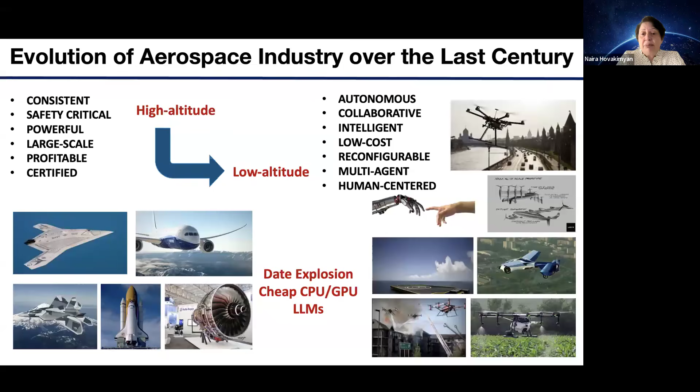This shift in the industry, as we observed it happen in front of our eyes, was largely conditioned by the fact that GPU and CPU technologies became cheap and available, which boosted machine learning algorithms up to foundation models and large language models. From the perspective of the aerospace industry, we observed a shift from high altitude space to low altitude space, for parcel delivery, emergency response, spraying for farms, and other applications typical of low altitude operations.

If we look at commercial aviation's evolution over the past century—it has been more than 100 years that commercial aviation has been available to us—by enforcing zero tolerance to accidents, commercial aviation has achieved safety and public trust, carrying 4.5 billion passengers over the year. It's undoubtedly one of the safest industries for transportation. As we now move into low altitude space, we need to develop the same level of public trust, because what we observe, especially over the last year, starting from the DCA airport collision and many other accidents in the low altitude space, shows that this industry is not yet ready, not yet mature.

There are lots of issues to be solved here, from path planning, routing, optimization, autonomy, and other types of solutions that can be vital for improving safety for this low altitude space.

This is one example scenario that was put up by MIT and Lockheed Martin back in 2018 to address challenges that have to do with emergency response in post-disaster areas.

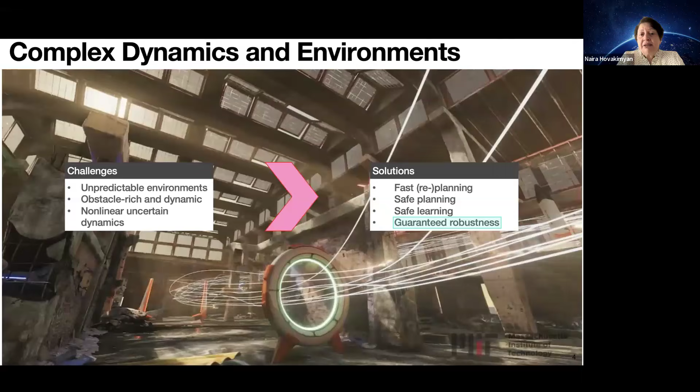What we observe in this environment is that one has to have vision-based sensors that can map the environment and help navigate the vehicle.

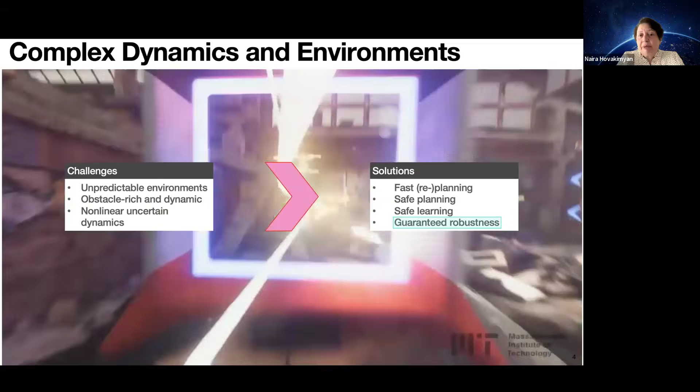In this environment, we need all types of guarantees of safety, robustness, and robust learning, fast path replanning - things we don't have to deal with in commercial aviation, where your flight envelope is prefixed and predetermined with maybe minor modifications along the way. Here we have continuous update of the environmental map that decides your next navigation point, and it brings up new challenges for the control design solutions.

So what is the situation here for the autonomy pipeline that we are interested in improving? We have sensors that map the environment, the sensors help the planner generate a path, and then the autopilot has to execute it.

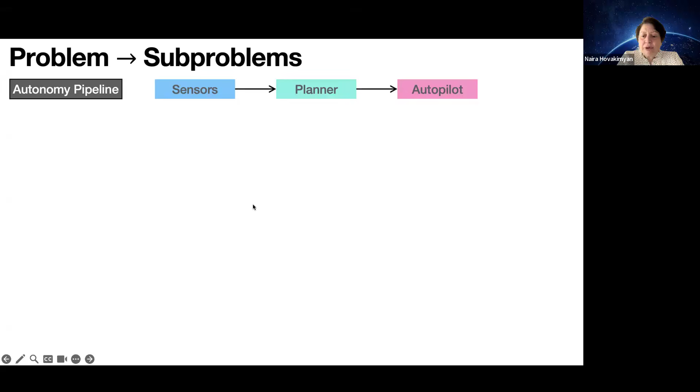The sensors map the environment, identifying obstacles, hazards, and goals. The planner generates the trajectories that the low-level autopilot has to follow. So the key question: what if the autopilot cannot deliver what the planner is asking for?

And what if the planner does not account for the errors in the environmental map? It's critical that the autopilot has awareness of its own performance and limits, and is capable of communicating it back to the planner so they can work in coordination.

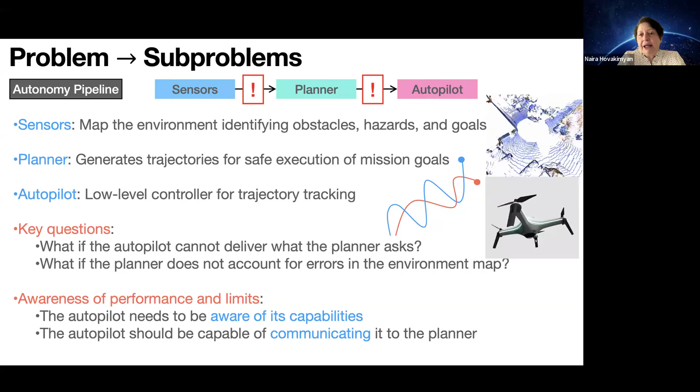This is basically the autonomy challenge. You have sensors, and you have to execute what the sensors map and guarantee safety in terms of a planning trajectory, and then you have to get feedback back.

The fundamental challenge that exists is the language barrier, because these are different systems on different levels of abstraction, and they all need to talk the same language.

This is because we have subsystems with data-driven learned components, while the typical autopilot will have, say, a PID controller or some other controller that comes from a deterministic model. This language barrier creates lots of challenges in terms of assessing the system's performance and robustness.

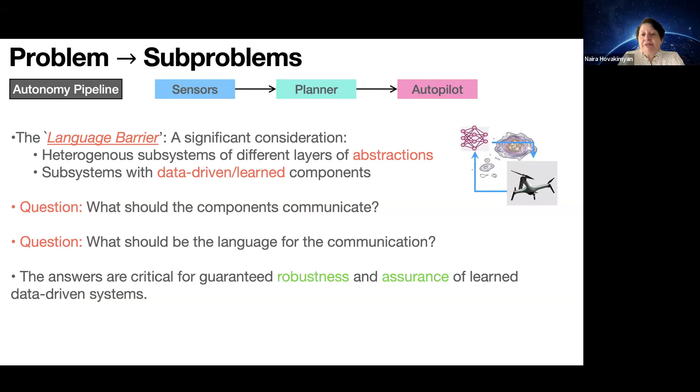So the questions we face: what should the components communicate to each other, and what should be the language for the communication? Typically, because this whole pipeline is huge, it goes from mapping, sensing, planning, up to control.

We observe different communities talking, developing their results in their own language, and quite often they don't talk to each other in a proficient way.

For example, people who do computer vision and path planning always make an assumption that there is some good autopilot that can track and follow whatever they do. But this may not always be the case, and this is where sometimes the robustness challenges appear.

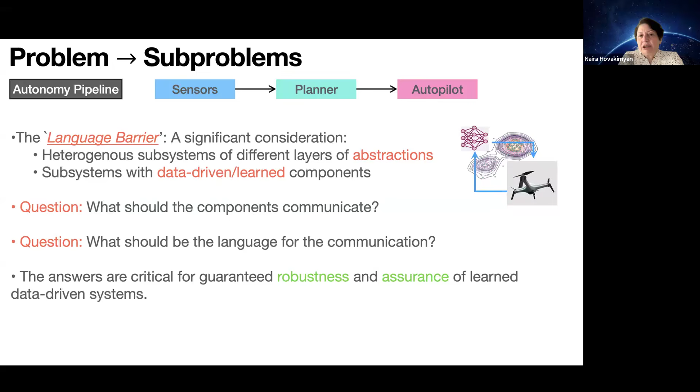General consolidation between machine learning and control should solve this language barrier problem. So given a system...

One would try to create its estimate by using the data and considering some model class, let it be neural networks, and minimizing a loss function, which would be the mathematical expectation of the loss function over the training data that was available to build this estimated model.

We refer to it as empirical risk. It depends upon the empirical data distribution given to you, either from past experiments, past trials, or simulations, flight simulators - there is some empirical data. There is a model class that we would choose, and based on that, we minimize this mathematical expectation over the training data, referring to it as empirical risk.

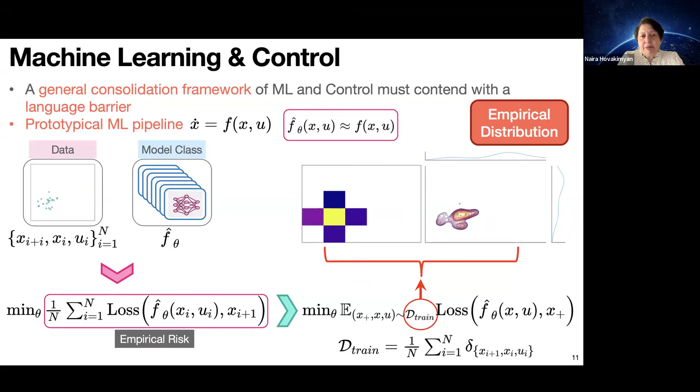What guarantees can we expect from these machine learned models? The trained model usually gives us the parametric estimate.

And the learned model certificate, which we refer to as model risk, will be guaranteed dependent upon the distributions - these are distribution dependent performance guarantees. It can be extended to Wasserstein ambiguity sets around the empirical distributions, and the literature is rich with different tools for how to achieve it.

However, when we go to the real world, we would rarely experience the same data sets. There will always be data that has not been captured during the training, during this machine learning process.

The causes of these distribution shifts are insufficient data, which can be epistemic - the learnable data - and aleatoric, which are unlearnable disturbances, environmental uncertainties that cannot be predicted. Engineers like to refer to these as known unknowns, unknown unknowns.

In the machine learning community, they refer to it as epistemic and aleatoric uncertainties.

So what are the typical solutions? These uncertainties that could be learned have an acceptable cost. For example, if you look into these animations, you can infinitely play with it, crash, fail, collect the data, learn again, and make sure your machine learning model gets better and better with more data and more learning.

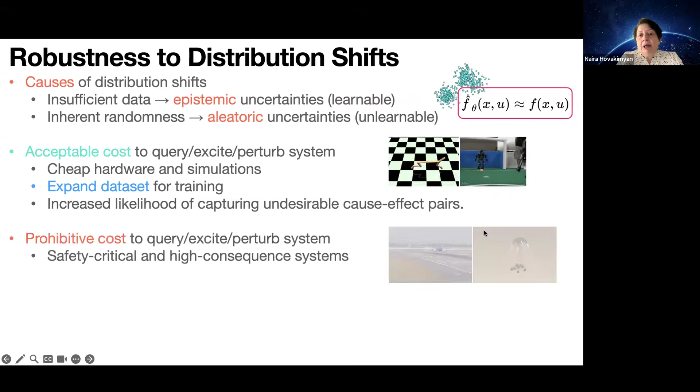But when we deal with safety critical systems like airplanes or landing a rover on Mars, you cannot go and crash infinite times, learn, collect the data, crash, and get this perfect machine learned model. So the cost here is prohibitive.

We need to analyze the systems that generate the data. We need to have architectures that would ensure safety regardless of the performance of the learning. This is the key point. So how can we ensure predictable and safe use of machine learning methods in controls?

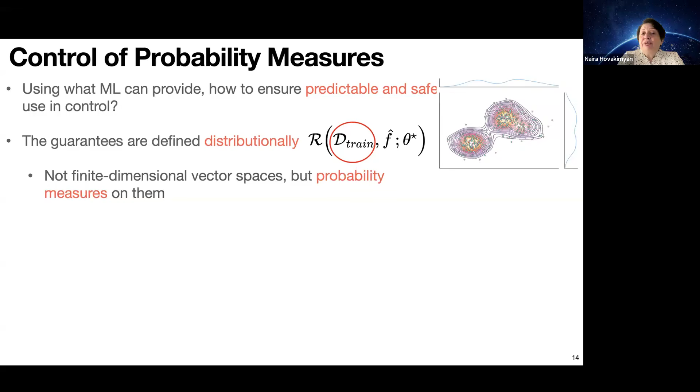The guarantees that are defined distributionally are not on finite dimensional vector spaces, but probability measures on them. Therefore, we need control architectures that would satisfy a priori uniform guarantees on the space of distributions, probability measures, and they would be applicable to general classes of nonlinear systems.

Subject to both epistemic and aleatoric uncertainties. This way, we can enable safe use of machine learning in control, right? And we can have safe predictive control, so to say.

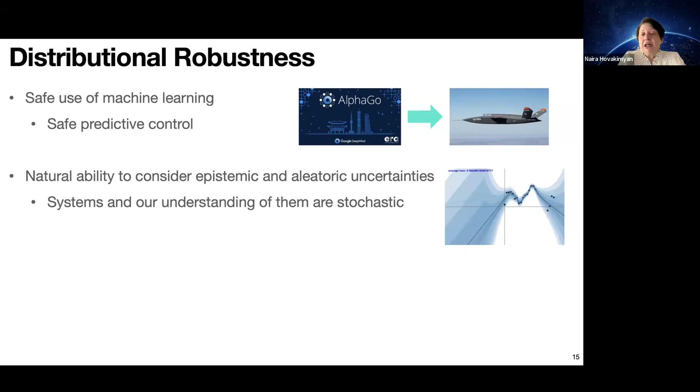Integrating both, a control architecture that would have these a priori guarantees, that would enable accommodation of a machine learning model, should be cast in a way so that it boosts our natural ability to consider epistemic and aleatoric uncertainties, the models of which are typically stochastic. And we can bridge the space between the design space and the test space.

If you look now today, for example, the way commercial aviation flight controllers are certified, they are designed deterministically using some gain scheduling, linearization, PIDs or LQRs with robust augmentation, and then they are tested in Monte Carlo simulations where uncertainties are inserted that are of stochastic nature. And then if you check all the Monte Carlo green, you are good to go.

But we can have a rigorous connection between the two spaces if we talk the same language and provide mathematical foundations, rigorous proofs to merge the language between the two spaces to have everything provable and predictable.

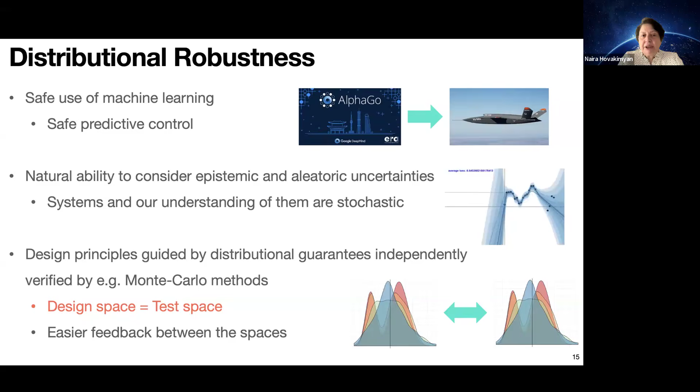The field of distributional robust control is rich. We are not the first ones asking questions of this nature, and we borrow lots of the results from the existing literature. However, there is one fundamental difference between what we do and what others do, and I will go through the details through the presentation.

We do not implement distributional feedback. We will prove distributional robustness guarantees for a deterministic feedback, and I will clarify this difference through my presentation.

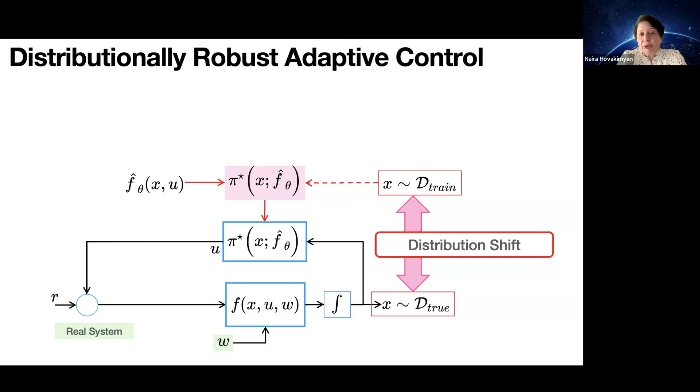So assume you have some machine learned model, which is here the f hat, kind of subindex with theta, function of system states and controls, that has given you the optimal control policy, denoted here by pi star. And as we implement, we face this distribution shift because the data in the real world will be different from the one that was used during training.

And we augment the system basically here. We want to augment it with our L1 adaptive controller that has been flown and tested on numerous systems over the past 20 years. So why L1 adaptive control?

It's a deterministic controller, but here is where we work to make sure the language is clean and all the proofs are very rigorous when you bring in a deterministic controller into a machine learned architecture. So let me just do a brief recap of L1 adaptive controller.

I have presented for MIT twice, so I will repeat a few things which are important for the rest of this presentation. It's an adaptive control architecture that has a low-pass filter in it. However, the low-pass filter is not blindly inserted into conventional model reference adaptive controllers. Before insertion of it, we use a state predictor type architecture to have a well-conditioned error dynamics, which is agnostic to the control signal and allows this low-pass filter insertion very rigorously.

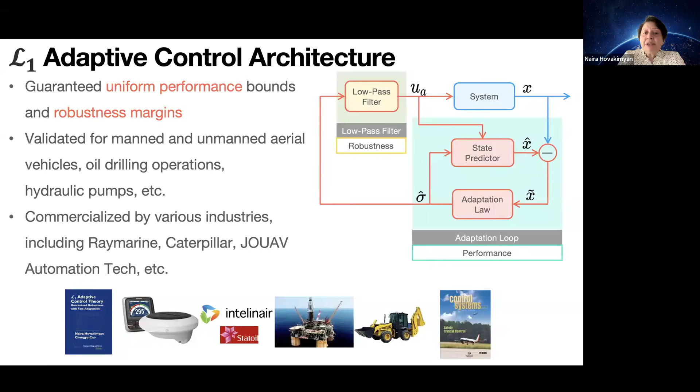It helps us decouple the performance bounds based on the adaptation gain, which improves the performance. The faster you adapt, the better you do. And the robustness is tuned through the bandwidth of this low-pass filter. This decoupling of adaptation and robustness is the key to the successful deployment of L1 adaptive controllers across a various range of platforms.

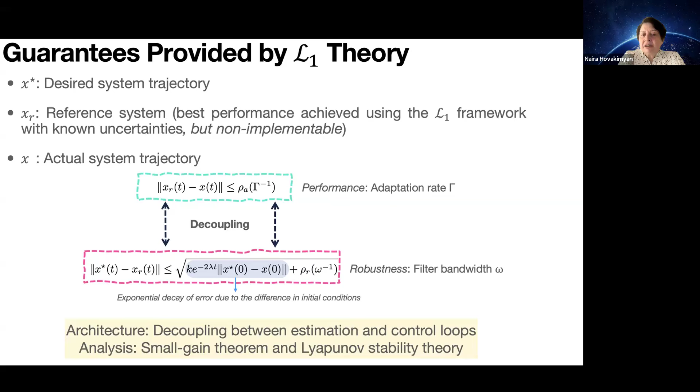So this architecture relies on small gain theorem and Lyapunov stability theory for its proofs. These methods are well established and exercised over the years. This is a deterministic solution, so it has certain conservatism coming from small gain theorem and Lyapunov stability theory.

The history of L1 adaptive control is summarized in this slide, starting from 2006, when we had the first papers appearing in ACC. In the same year, we had a path planning paper with a flight test appearing in AIAA GNC conference. The flights were done by Naval Postgraduate School using the Rascal autopilot, Rascal UAV with Piccolo autopilot. Then during 2007 to 10, we had NASA flight testing the L1 adaptive controller on a subscale Boeing 757 model that you see here on this slide.

Later, this success story led us to lots of opportunities to work with Raytheon, Boeing, and other companies like Eurocopter, MBDA, for testing it on different platforms. Raymarine commercialized it for evolution autopilots for marine vehicles. Caterpillar commercialized it for hydraulic pumps. Statoil tested it on an experimental rig, and then that was before the oil prices crashed, and we remained on the experimental rig. It didn't move forward due to the change of the world towards green technologies. So there was a period when the oil industry was suffering. Later, we got this opportunity from 2018 to 20 to test it on real Learjet and the Vista F-16 platforms at Edwards Air Force Base, test pilot school. I had a former student working there who gave us the opportunity to fly these platforms, and I will show some movies now.

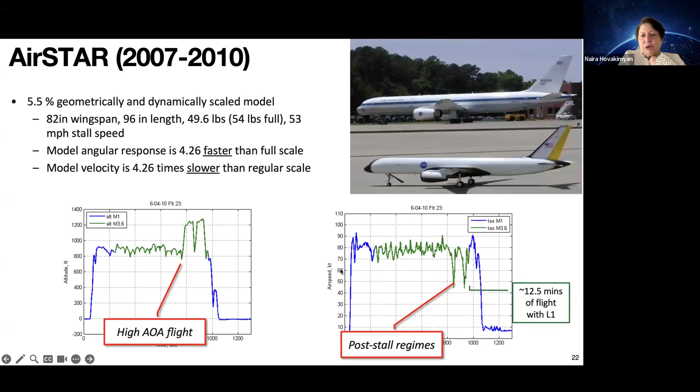So here are some brief flight tests from NASA, past 2007-10. NASA spent a few years to build this subscale Boeing 757 model, and they pushed it into stall and post-stall. These are one of the first tests here. As you see here is where they go into stall condition. The airspeed drops below 40.

Slow down just a little bit. We're going to try ramping up to 15. Hold it around 18. Slow back to normal flight. Fuel state is 4.7. Let's repeat that. Climb maintain 1,200. Now slow down a little bit. Okay, gonna start my pull here. Bingo, they ran out of gas.

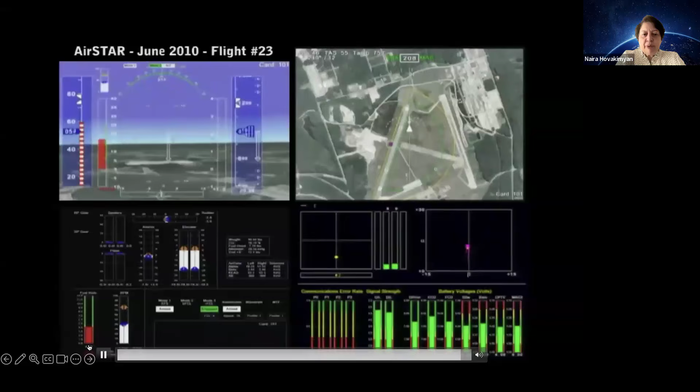So just to summarize, this was the only controller flown by NASA into stall and post-stall flight regimes.

Here is where they go into the departure edge of the flight envelope. The stall occurs at 12-degree angle of attack, as you see, and they push it to 28, and they start Schroeder sweeps for system identification. Setting 40% RPM for the entry. So they use it for updating the aerodynamic models.

Here is a quick capture of two trials of going into stall and post-stall, and they even note repeated oscillations, because when they go through that stall condition there is some shaking. So the repeatable results were verified per the theory.

And it's more exciting, of course, to watch how it was flown on manned aircraft, because it's one thing unmanned, it's one thing manned. With the manned aircraft, they didn't have the flight opportunity to go into stall and post-stall. But here is a flight test when the pilots are required to do flying qualities assessment. So when you fly an airplane and you have no fasten seatbelt sign, it's flying qualities level 1. When you get a little bit of turbulence, then it drops to flying qualities level 2, level 3.

Test pilot school students who are going to get their pilot license are given a paper with the Cooper-Harper rating scale, and they have to do flying qualities evaluation. When the airplane shakes up because of inserted disturbance, this was the type of F-100 Sabre dance - there was a famous accident I won't show here. So they're asked to do this flying qualities evaluation, and it's very shaky, they can't do it. They ask for the L1 controller to come on. You'll see them request Cooper-Harper ratings, CHR ratings - it will come up as an abbreviation. I give this preview so you know what to watch for.

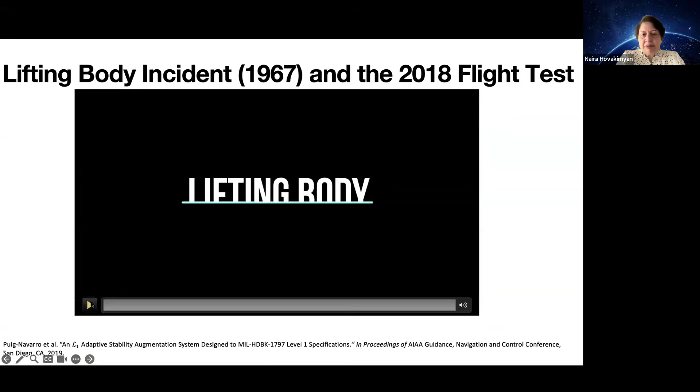In 2018 we went for different types of uncertainties. In this case, they had aircraft accident data from 1967 that they were able to load onto the airplane, to see how the airplane would behave without our controller and with our controller.

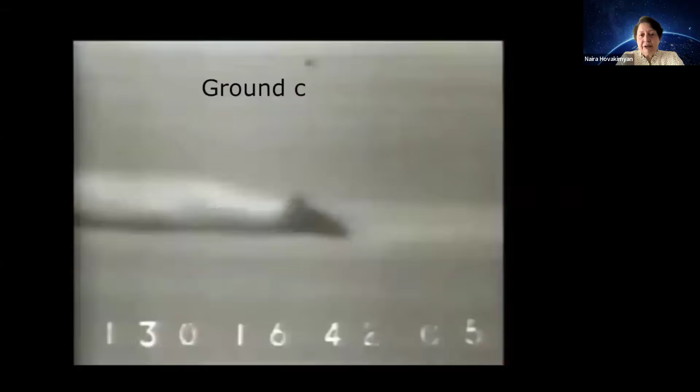So this is the way the pilots get their pilot license. They have this test aircraft on which they can mimic different dynamics by loading data from past accidents or mimicking other conditions. It has this variable stability system that can shut down the accident to save the aircraft. Now you will see - it's a second, and it shut down the accident to save the airplane.

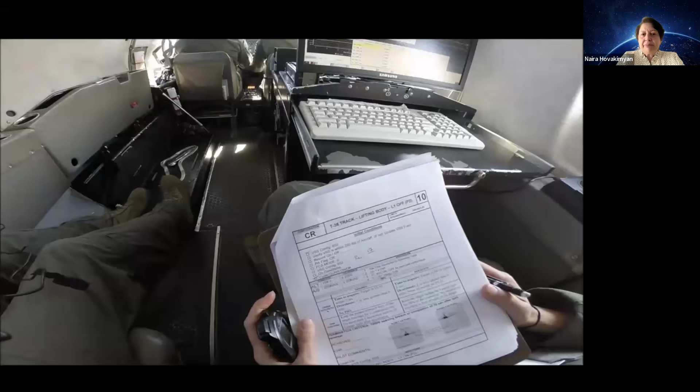I can't even control the airplane. Do you have your airplane?

You see the student on the left is my student, and on the right we have the flight test engineer.

Now L1 controller on, they go through the same accident. Okay, task in 3, 2, 1. Now?

So you can feel there, in high frequency I made some high frequency inputs, excited the roll. Lower frequency, the roll overshoot or oscillation tendency is less. Sounds good, there's still some there. Pitch, I'm having no issues. Fine tracking and gross tracking are very good at pitch. All right, and I have maneuver complete.

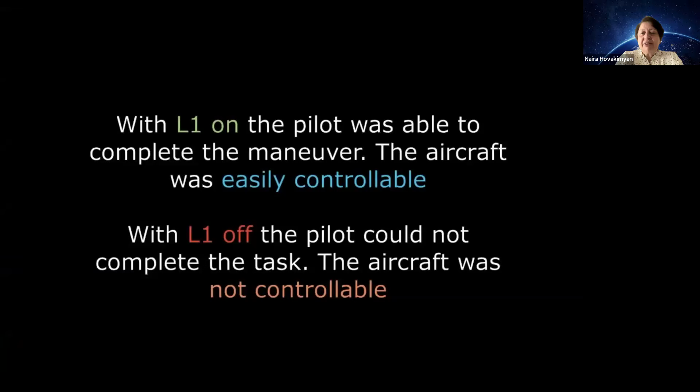You heard it said there is still something there, and our stochastic analysis brings the answer to that.

Now they go into engine-out flight test.

All right, recording on in ready, hack. Running. Okay, power's coming back. My hands are free. 3, 2, 1, now. Controls fixed. Recover, please. You see 20-degree bank degradation here on the right.

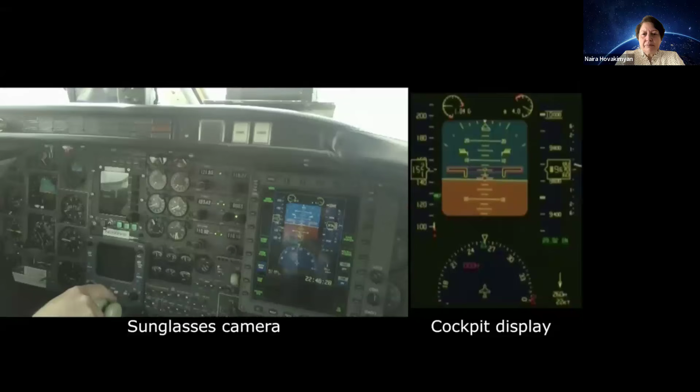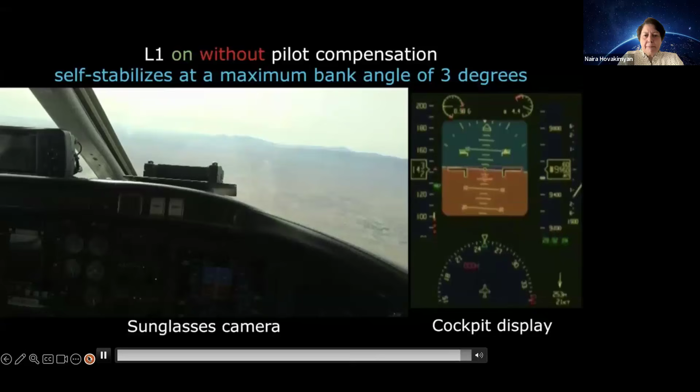And now they go with L1. Ready for the recording on, ready, hack. On. Okay, left throttle coming back in 3, 2, 1, now. I'm not touching the controls. Nice demonstration - yeah, check that out. About 3 degrees of left bank, stepping on the rudder to match. I can feel it, it's descending a little bit, but that would be easy to compensate for. Yeah, okay. I think you got some good data there. All right, recording off, matching power, recordings coming off.

So you see something was left there in the first flight, and something like 3 degrees are left here in case of engine shutdown. These are questions that the deterministic analysis could not answer, but the stochastic analysis that we did brought the answer for these questions. And now I will go through details.

We were on the front page of Aerospace Defense Technology.

I got this message from our College of Engineering. I was not interviewed in this case.

It was great to see that we were captured by some media sources, while in previous cases we were always interviewed by Aviation Week.

With these great success stories, this year we had Lockheed Martin using the modernized Vista for autonomy architectures, flying heat to guns with a failed right flap. I have only 12 seconds of video released by Lockheed Martin for my presentations.

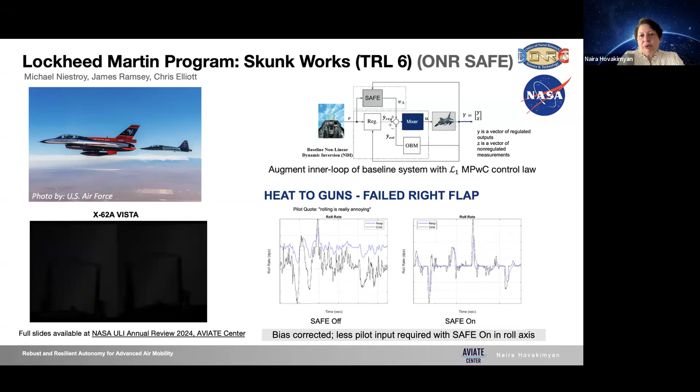Just observe how it remains in green, and in the other case, without L1, it's out of the green. SAFE refers to the ONR SAFE program, and Lockheed Martin was able to claim TRL6, Technology Readiness Level 6.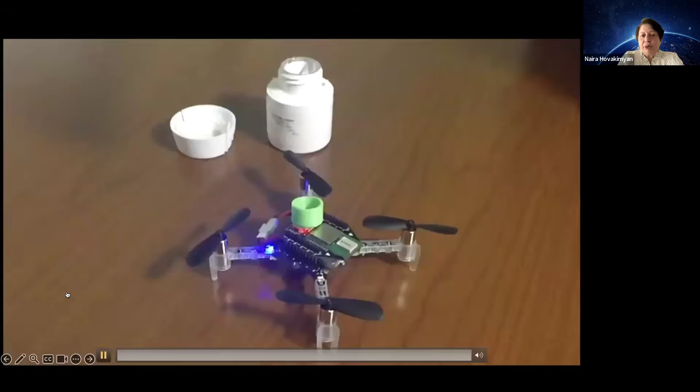We had other applications of the L1 adaptive controller on different platforms, like, for example, this one that got us into the New York Times. I'll just show it—it was for elderly care, something out of fantasy.

But it was fun to work with psychologists who helped build anxiety models that can be used in the path planning cost functions and enable different indoor applications.

And we use VR systems to test people's perception of safety.

And fantasy, because we kind of watched this Disney cartoon to formulate some problems, right? Here, they try to shower. So you see lots of control problems come up.

Coming to this environment now, what motivated this presentation: we have to formulate the problems, understand the challenge—unpredictable environments, obstacle-rich.

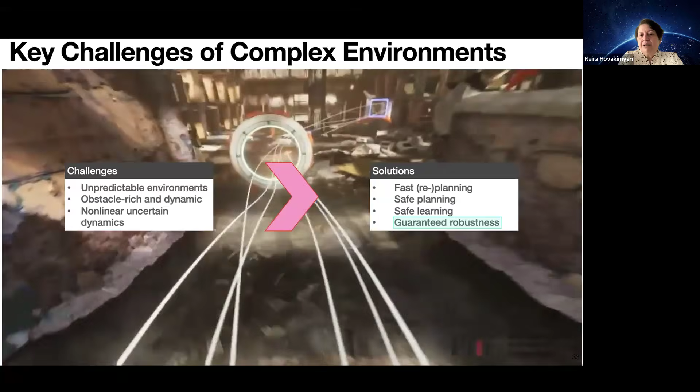This is not the open flight envelope, 30,000 feet high without obstacles, where you just do path planning and that's it, dealing with weather uncertainties or disturbances from climate changes.

Here you have to do fast replanning, continuously map your environment. It's an emergency response situation.

And what does this mean? In the context of L1 adaptive controls, deterministic development, we had paid attention to transient performance guarantee, steady state performance, time delay margin, disturbance rejection—the basics of 101 controls that we teach at junior or senior level control class on classical control.

So now as the world around it changes, we need new forms of guarantees. We need guarantees that would work with stochastic planners.

The stochastic planner gives me a reference path, which I do not know a priori. It continuously updates. This means conventional classical control deterministic guarantees are not good for these environments. We need a new type of distributional guarantees.

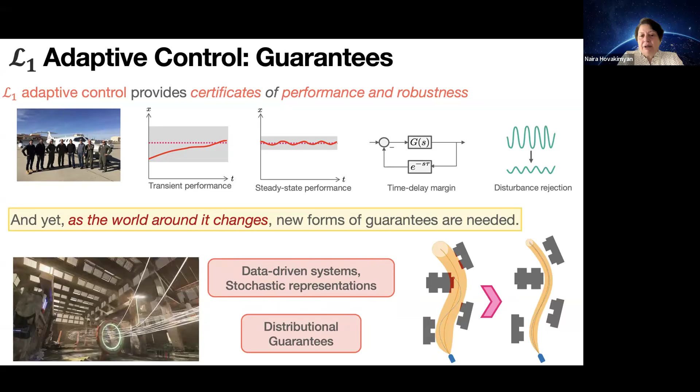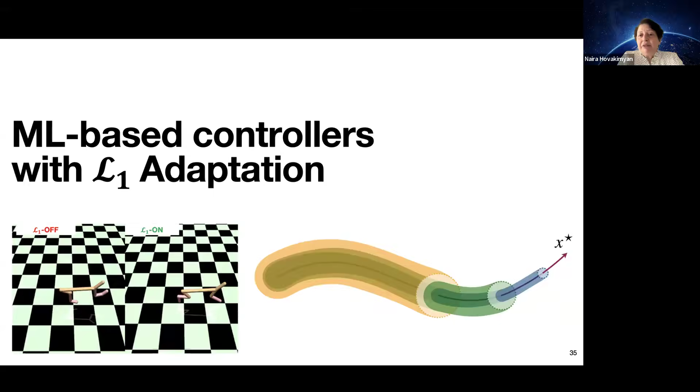I was challenged to look into this environment during my 2018 visit to Georgia Tech by Evangelos Theodorou, who was one of the finalists of that competition. He used the MPPI controller, although he did not come out as the winner, he was one of the finalists.

He was well familiar with the environment, and he uses this model predictive path integral controller that provides a framework for solving nonlinear MPC with complex constraints in near real time. He asked us if we could bring the L1 adaptive controller as an augmentation to it.

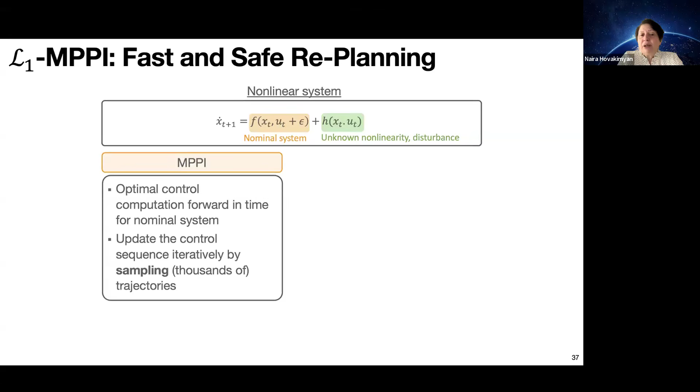So we have a nonlinear system with known and unknown components where he applies the MPPI. It helps update the control sequence iteratively by sampling thousands of trajectories. And we bring L1 to robustify against the discrepancies.

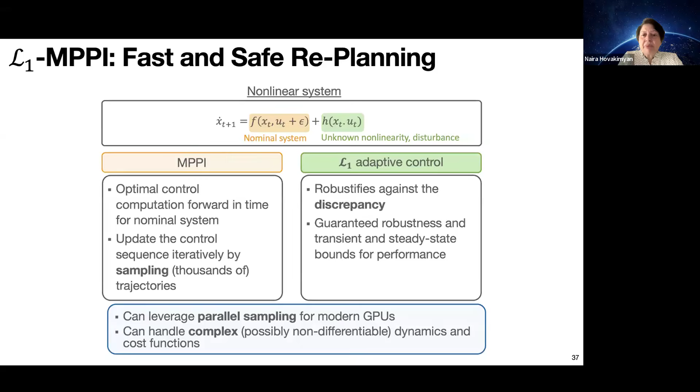This type of architecture can leverage parallel sampling for modern GPUs and handle complex, possibly non-differentiable dynamics and cost functions. This was an empirical trial, and we were able to clear all the gates that he failed to clear.

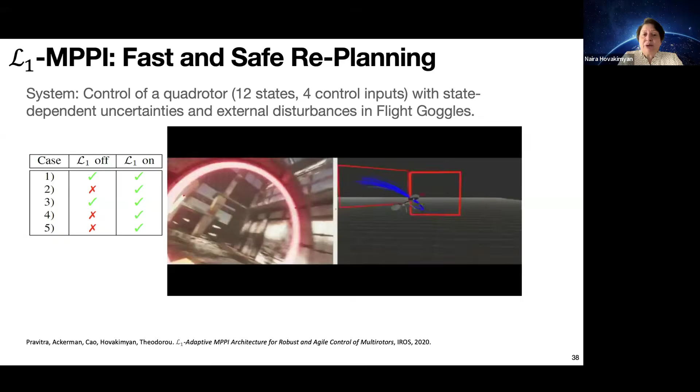We got a paper in 2020 IROS, and I have to acknowledge all the students of Georgia Tech who tirelessly worked on this. You know, 2020 was the COVID year, and doing these trials at Georgia Tech, the students had to go into the lab in turns with masks and make this happen. And we made it.

So it took us a bit longer than if we had the opportunity to work together closely, send our students to Georgia Tech and get them back. But doing everything remotely, going into the lab one by one, and testing it was really challenging.

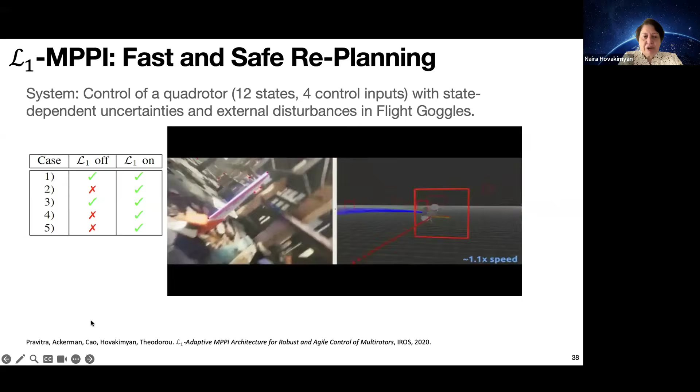And they have some flight tests also at Georgia Tech, the movie which I do not have.

So this experience led us to formulating L1 adaptive augmentation, also a model-based reinforcement learning algorithm. So we're augmenting now machine learning baseline controllers. That was MPPI. Now trying to augment a model-based reinforcement learning algorithm.

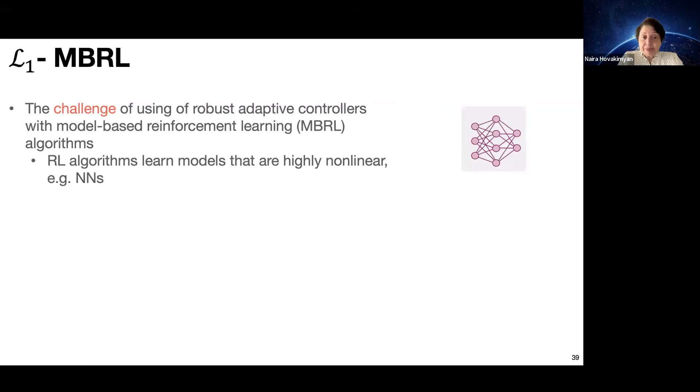So we have new challenges. These reinforcement learning algorithms learn models that are highly nonlinear, and the parameters of it do not equal the true parameters of the physical system. Nominal models produced by MBRL are not amenable to control tools. One possible solution is to constrain the model structure to the control-affine or linear class at the price of sacrificing the performance.

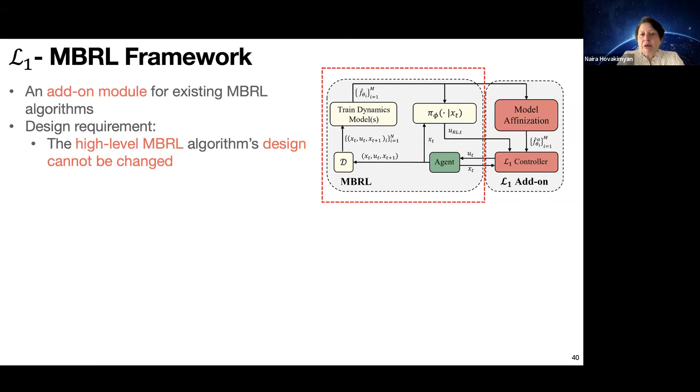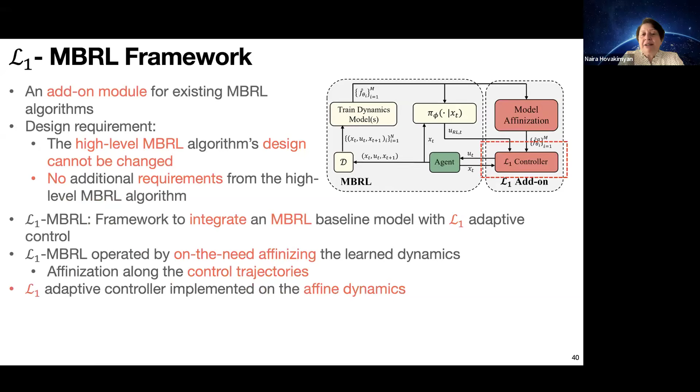So we have to bring in L1 as an add-on module for an existing MBRL algorithm. Here are the design requirements we have to acknowledge and face. One is that the high-level MBRL cannot be changed, and no additional requirements from the high-level MBRL can be made. So we have to integrate an MBRL baseline model with L1 adaptive controller when L1 is operated on the need of affinizing the learned dynamics, and affinization happens along the control trajectories, and L1 gets implemented on the affinized dynamics.

We got the paper into ICLR 2024. It was presented by my students in Vienna during this conference. And we tested 5 benchmark environments for MBRL: inverted pendulum, swimmer, hopper, walker, and half cheetah.

We got that in all the cases, except for one, L1 adaptive augmentation improved the performance of MBRL when tested for new environments, the data of which was not used during training. This is the challenge: MBRL was well trained, well working. You put it into a new environment, it has performance deterioration. Almost in every case, we improve the performance with L1, and this is a single L1 design for all these environments without redesign or retuning. That's why, for example, in one of the cases, we did not have improvement.

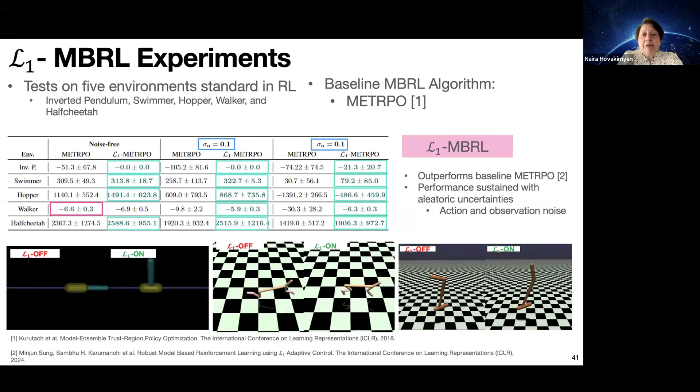So now our guarantees are probabilistic. While these two papers, as I mentioned, the MPPI one from IROS and this one from ICLR, were done largely empirically, we developed the rigorous theory since then, having this empirical evidence for distributionally robust guarantees.

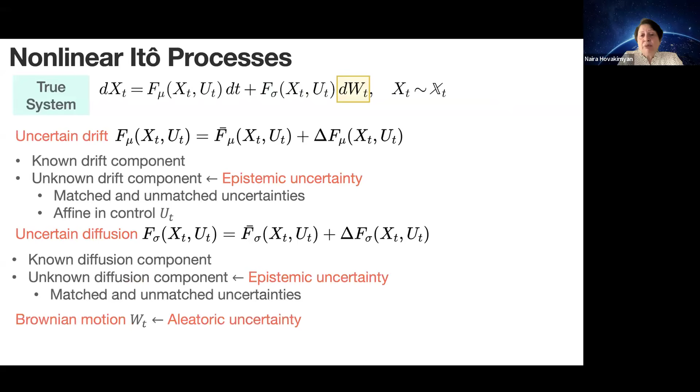So let's look into a nonlinear Ito process where we have the uncertain drift term that can be decomposed into known and unknown components. And we have an uncertain diffusion term, which can also be decomposed into known and unknown components. And we have the Brownian motion for modeling the aleatoric uncertainty.

As the true system evolves, we can rewrite these terms, the known and unknown diffusion, known and unknown drift terms, and we have to build a nominal system for our analysis. As always, we need a nominal system, some baseline with respect to which our adaptive augmentation will compensate for the uncertainties. The nominal system to be built here uses the known terms of the drift and diffusion and uses a nominal Brownian motion.

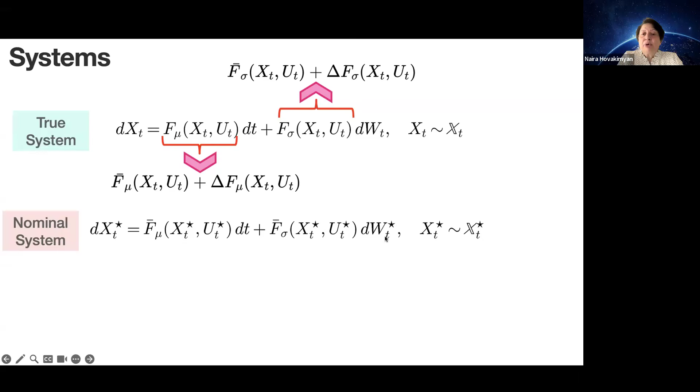So the nominal system is free of epistemic uncertainties, but it cannot be free from aleatoric uncertainties, the Brownian motion, because otherwise it's not a fair nominal system for a nonlinear Ito process. The key assumption one has to make here and face is that the Brownian motions of the true system and the nominal system have to be independent.

This is a very challenging assumption, and this is what helps us justify those small disturbances that the pilots complained about. There is something still left there, 3 degrees left, but that was good enough. It is this independence of the Brownian motions that justifies these deviations that we observe in the real world. Otherwise, in the real world, there is always some noise which can never be captured. And this analysis brings up...

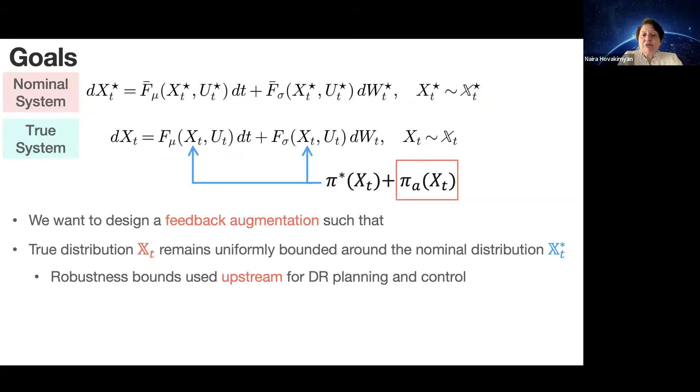There is a distribution shift, obviously, between the nominal system and the true system. So now, what is our goal? Our goal is to design a feedback augmentation such that the true distribution remains uniformly bounded around the nominal distribution, and the robustness bounds can be used for upstream distributionally robust planning and control. The bounds will be considered in the Wasserstein metric, which we borrow from optimal transport theory, a metric that preserves the distance and shape on the space of distributions.

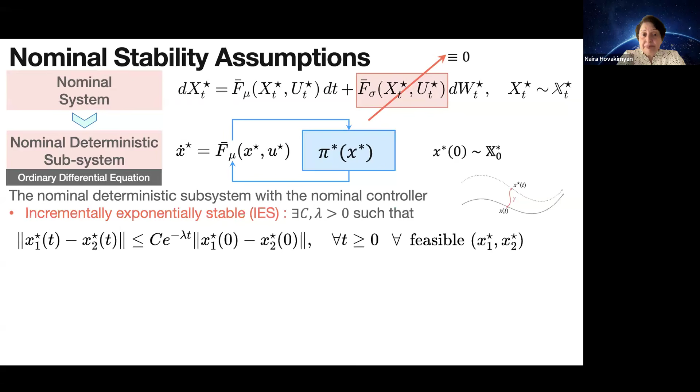Moving forward, we need some assumptions on the nominal system. If this is our nominal system, if we take out the diffusion term and are left with drift, it's a nominal deterministic subsystem. Let's first formulate the assumptions for it. For the nominal deterministic subsystem, our optimized control policy must ensure incremental exponential stability and existence of incremental Lyapunov functions that would help us do this proof.

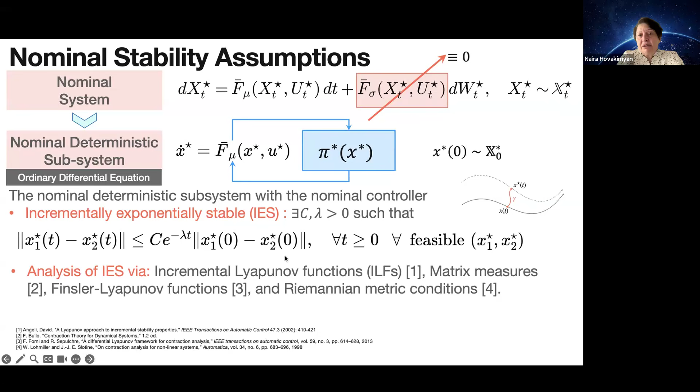So this analysis is done using incremental Lyapunov functions, matrix measures, Finsler-Lyapunov functions, and Riemannian metric conditions. For details, there are a bunch of papers. This type of analysis is important to have in place for the nominal deterministic subsystem in the absence of the diffusion term, which also takes away the Brownian motion, the aleatoric uncertainty.

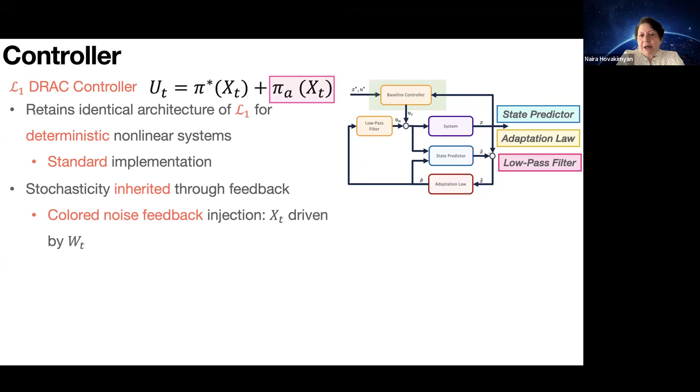So we have the deterministic controller that was flown on this Learjet, Vista, subscale Boeing 757. And we look into the analysis of this controller when it's working in the true system, in the real world. When it works in the real world, the stochasticity comes through the feedback. So it's important to correctly understand, we are not implementing a distributional feedback. We are implementing the deterministic feedback.

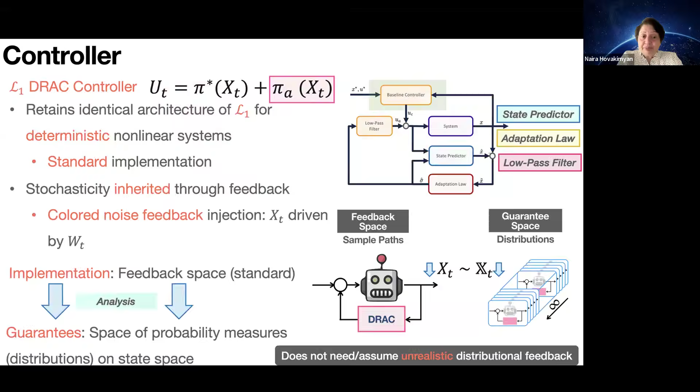There is no unreasonable assumption here that we are running a distributional L1 adaptive controller, running million samples, picking one at every second. No, it's the deterministic controller that's flying. We're trying to get guarantees for it in the space of distributions. And that implies we need to understand that the deterministic controller, when it's implemented, it inherits colored noise through the injection of the state and the Brownian motion. Through the feedback loops, it gets all kinds of bad things that make the process very hard. That's why finalizing this paper took 4 years from us, because we didn't want to step away from what's happening in the real world to make our life in mathematical proofs easier. We wanted to prove what's real, right? So the real thing. So now we look into the different elements.

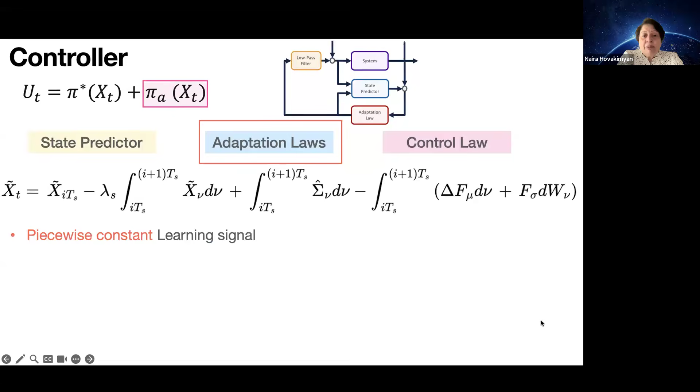So the adaptation laws use the piecewise constant learning signal. These are new types of adaptive laws that were derived in the process of development of L1 adaptive control theory. This is not projection based. This is not gradient descent. These are new types of estimation laws. They are piecewise constant. The sampling period is TS.

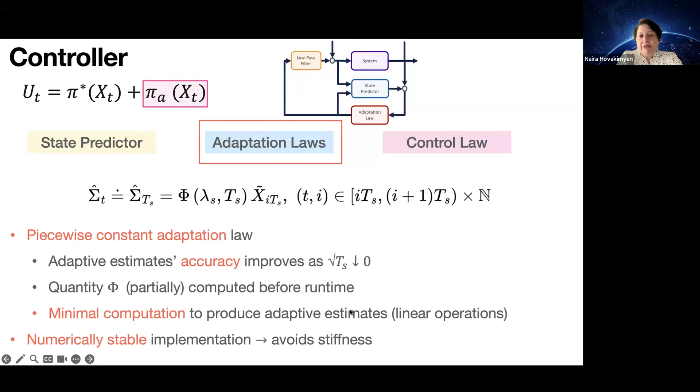The estimation error here can be again evaluated. You see the square root here for the standard deviation. And we have the kind of piecewise constant adaptive law summarized here. The adaptive estimate's accuracy improves as the sampling interval goes to 0. This quantity phi, it's the state transition matrix in the deterministic case, so it's computed before runtime. Minimal computation is needed to produce adaptive estimates. These are all linear operations. It's numerically stable, avoids stiffness.

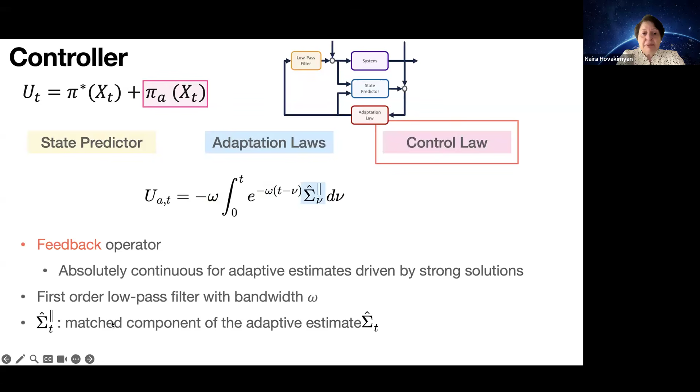We get uniform bounds guaranteed in the space of distributions and also pathwise. So what do these bounds say? The distributional bounds are given in terms of Wasserstein norms, and the pathwise bounds are given in terms of the probability of being safe, right? So if the paths are, delta denotes the probability of being unsafe, so you want a smaller delta.

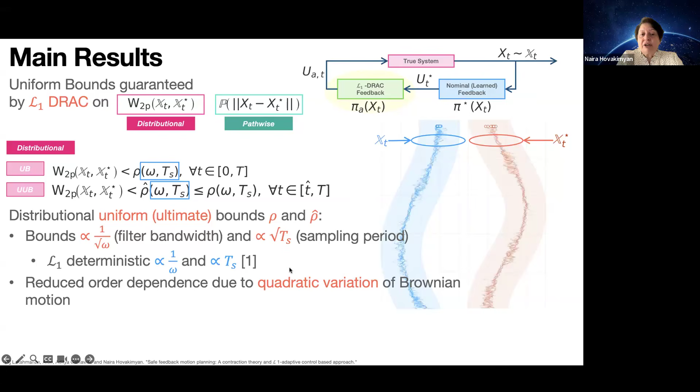So the distributional guarantees, if we look here, the Wasserstein norms are guaranteed to have these bounds, rho and rho hat, that depend upon the Wasserstein distance between the initial distributions. They are bounded away from zero due to the unmatched uncertainties, independence of the driving Brownian motions, and these bounds are proportional to the filter bandwidth and the sampling period. So this is similar to the L1 deterministic performance bound, but we have the square roots here, and that comes because of the quadratic variation of the Brownian motion. So our bounds get even refined, which is natural because in the deterministic case, you are very conservative with small gain and Lyapunov. In the stochastic case, because of the stochasticity, you should be able to improve these bounds, right?

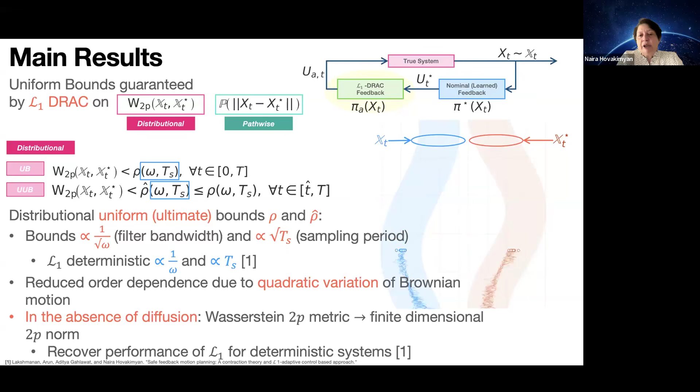Because now you get only probabilistic guarantees. In the absence of diffusion, when we're back to deterministic systems, we recover the performance bounds of L1 adaptive controller for deterministic systems. Now, if we look into the pathwise bounds, the pathwise uniform ultimate guarantees.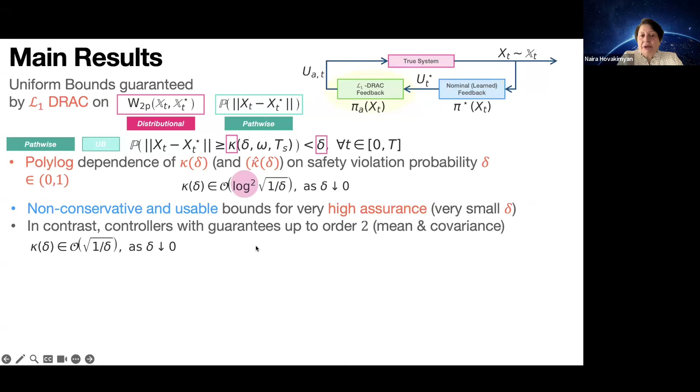In contrast, controllers with guarantees up to the order 2 mean and covariance, for example in the literature, will have bounds of this nature without the log term. To experience the difference, here is the difference when the log bound just becomes more useful for planning purposes.

So what we are proving here are the Wasserstein bounds for the L1 adaptive controller in the sense of distributions, and in the case of this pathwise deviation. We want these bounds to be useful for planners. So imagine how useful the bound given by the blue term can be versus the bound by the red. This is a finer bound that the planner can use for planning less conservatively.

While the other bound quite often is just not useful and people just keep playing with simulations to get results. So here is the angular rate dynamics of a quadrotor, and you see we project here this tracking of the Wasserstein bounds on the left and right. This is when L1 adaptive controller is on, and here is when it's off, and yellow is the nominal.

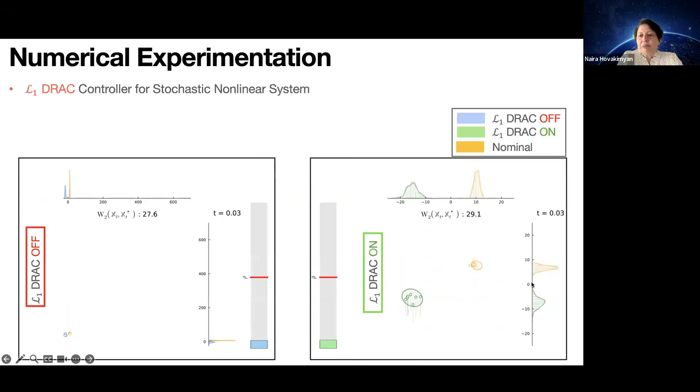So as you see, the nominal is a nice Gaussian, while the green is tracking it, bringing it to coincide with the Gaussian.

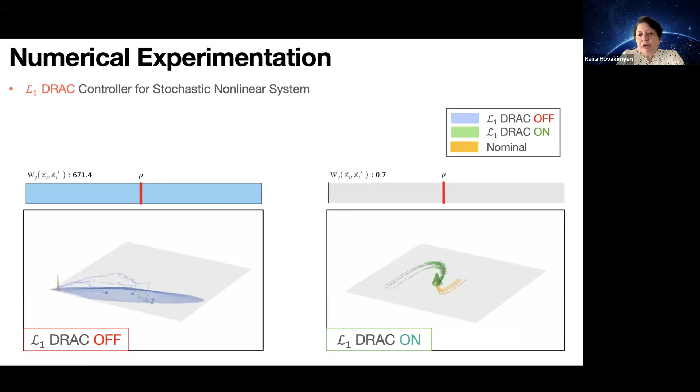And here is it more visualized in terms of distributions. As we said, the bound remains bounded away from zero. This is due to the independence of the Brownian motions that are driving the true system and the nominal system, with respect to which we compute these bounds. So the noise of the real world is there, keeping us away from zero.

So if we revisit the autonomy pipeline, we use basically the L1 distributionally robust adaptive controller as the low-level controller within the pipeline. It's enabled by the guaranteed uniform distributional bounds in Wasserstein sense. And next, we developed the distributionally robust feedback motion planners.

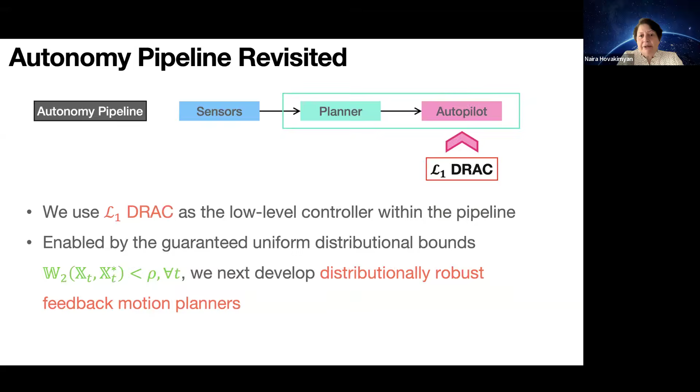This is a CDC paper. It will be presented in Brazil. So what we do is use the bounds of the L1 adaptive controller for the planner. This is what we said is our aim. That's why the proof takes 4 years to get a bound that can be useful.

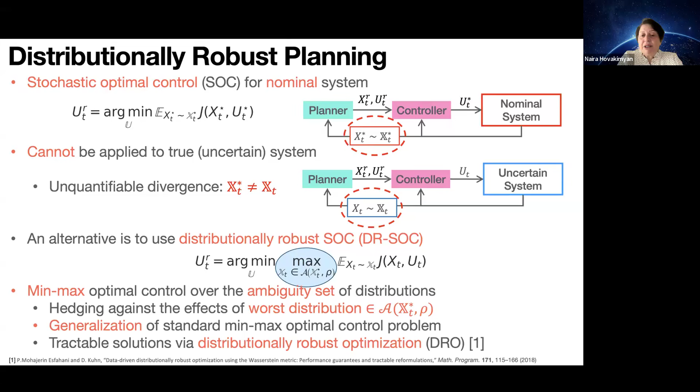So if we look into the stochastic optimal control literature for designing planners, it cannot be applied to true uncertain systems due to the unquantifiable divergence. An alternative is to use distributionally robust stochastic optimal controllers, and the literature is rich on it. It gives you min-max optimal control over the ambiguity set of distributions, hedging against the effects of worst distributions in the ambiguity set, and a generalization of the standard min-max optimal control problem is what's being solved in this literature. So we get tractable solutions via distributionally robust optimization, and there are plenty of papers in the literature doing that.

So what does the planner require? The planner requires the existence of an ambiguity set such that the true distribution will remain within it around the nominal distribution. Ambiguity sets can be determined under some scenarios, such as the availability of sufficient samples from true distributions. This is what's common in the literature.

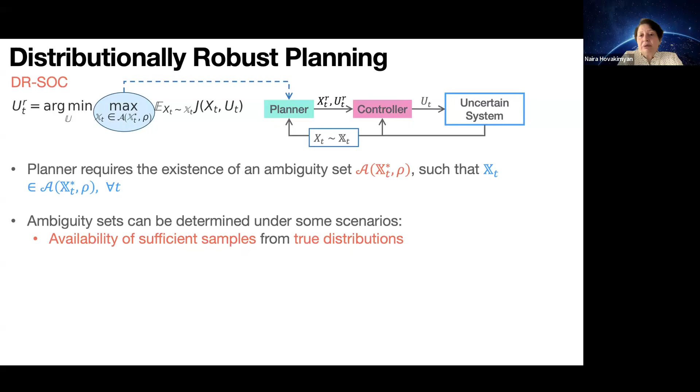In our case, no, we do not say availability of sufficient samples from true distributions. We use just one sample xt from the true distribution. That's your feedback, at the current point. Our controller is deterministic. The guarantees are in the space of distributions. So we don't have this assumption.

Again, the literature assumes known bounds for the moments of xt. We only assume finiteness of the second moment via well-posedness. And again, what we see in the literature, the state distribution is compactly supported over known sets. In our case, it's allowed to be unbounded.

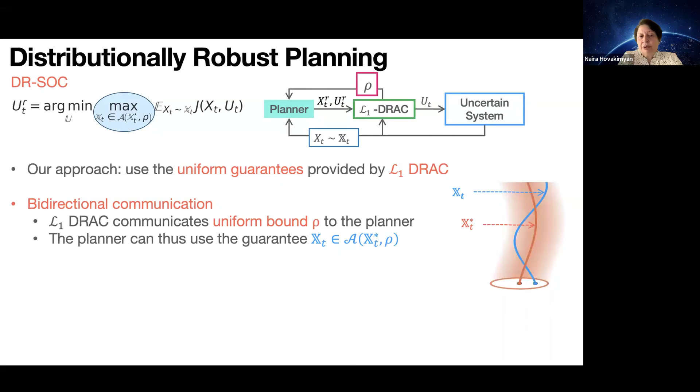Our approach uses the uniform guarantees provided by the L1 distributionally robust adaptive controller, and bidirectional communication between the planner and the controller is facilitated by L1's communication of the uniform bound to the planner. The planner can use it to generate the ambiguity set, the guarantee for the ambiguity set. And the performance guarantees are enabled by bidirectional communication. We get guaranteed distributionally robust planning and control of uncertain processes.

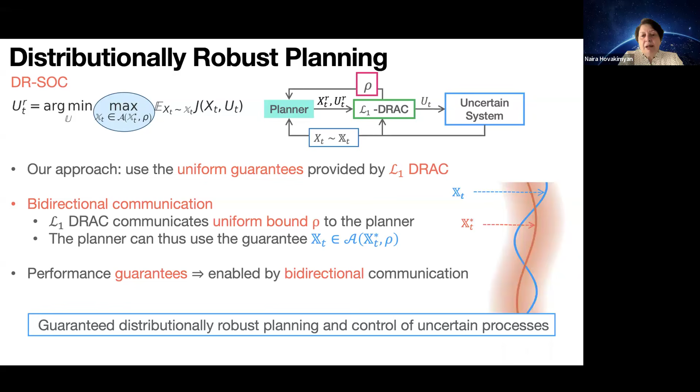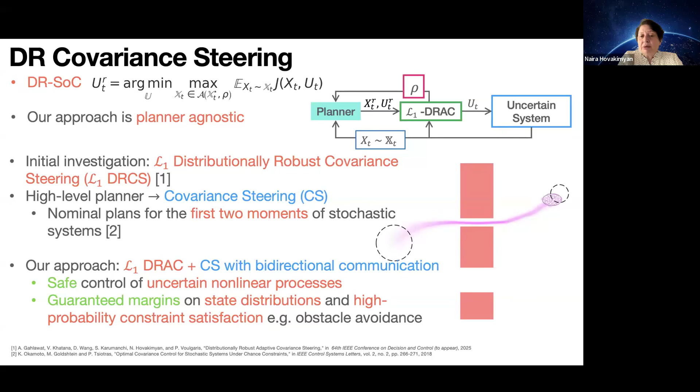Our approach is planner agnostic. The initial investigation we did for L1 distributionally robust covariance steering is in CDC. The high-level planner is a covariance steering controller. It has nominal plans for the first two moments of the stochastic system, and our approach will enable safe control of uncertain nonlinear processes with guaranteed margins on state distributions and high probability constraint satisfaction, for example obstacle avoidance.

Let's see what happens. Here are some numerical experiments. We have safe navigation of a 4D system, a double integrator here. The true system is perturbed by an unknown nonlinear drift term and diffusion. And the covariance steering here is how it works.

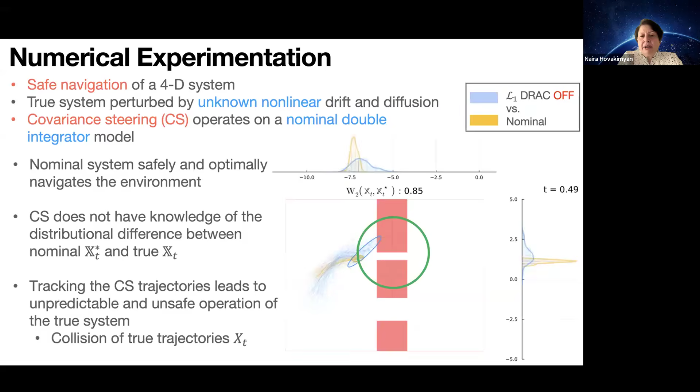As you see here, the yellow is the nominal. When the uncertainty is wrapped around it, the blue, it starts colliding with the obstacles. And as we put the L1 adaptive controller, it would find the path because it will communicate the bound of what L1 can do, where it's safe, and the covariance steering will steer it correctly through the safe passage.

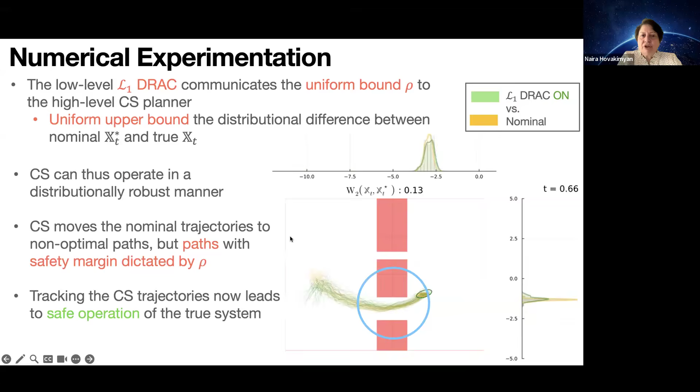So this is what we are achieving with the help of L1. What you see on the left and right is again the tracking of the nominal distribution, which is the yellow, which is the Gaussian, and the green is the true system, which is not a perfect Gaussian but it tracks and achieves it.

So some of the ongoing and future directions: predictable and certifiable data-driven control. We have a decoupled framework where we separate safety from performance. Safety is important for planning and control. It has to be online and persistent.

Performance is driven by the data. So data-driven learning can improve the performance. It can be done offline and opportunistically online, but it's important to have safety always guaranteed, regardless of the performance of the learning. So the learning can be intermittent, in some sense, from the perspective of online processes.

So what we said in the beginning is that we want to bridge the two worlds. We have distributionally robust planning and control with L1 adaptive control architecture, and we have data-driven learning, and now they speak the same language. The bounds from distributionally robust L1 adaptive control can be used by the learning algorithm, and it can be efficiently used for planning purposes and for other types of challenges like in vision systems and other ML applications.

So the next step is to include perception and other high-dimensional sensing through high probability finite sample guarantees of Wasserstein metrics. We have to get local high probability results too, to make it very useful for robotics applications. The current results are of global nature for now.

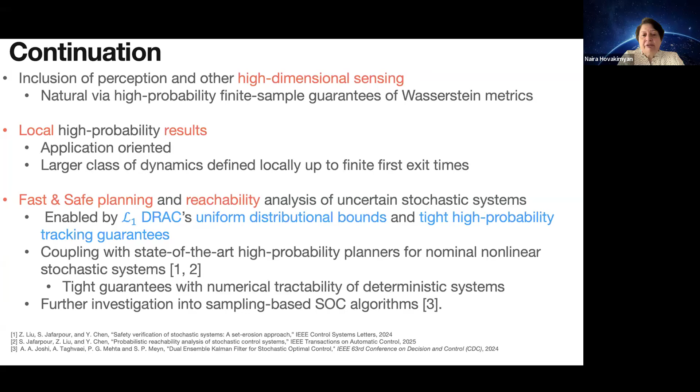And further investigation into sampling-based stochastic optimal control algorithms, we have a variety of methods here to be explored. We can extend L1 to sampled-data systems to enable a broader class of systems and continue development of novel approaches suited to the contemporary requirements of high-performing data-driven subsystems consolidated in a large system, guided by generalization, regardless of the complexity of systems and solutions. Removing complexity should always lead to existing sound results.

This is what we have signed under: when all this stochasticity goes away, nonlinearity goes away, everything, we're back to gain and phase margins that people can understand. This is what helps us talk with industry, because when we present these results, it looks complex on the other side. But then we say, okay, take out diffusion, take out this and that, we are back to gain and phase margins. See, all these bounds naturally collapse.

And this just kind of helped us move forward always, that during this generalization we watch out for these principles. It can present a new perspective for certification authorities, because that links back all the way to known gain and phase margins used in contemporary regulations. That would be a path forward to verifiable adoption of autonomy for safety critical systems.